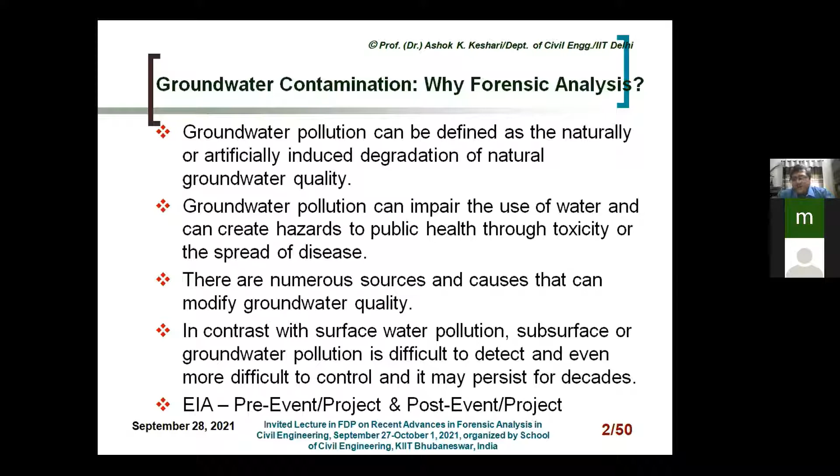And in the forensic analysis, we try to investigate or to find out that really this is the industry, or this is the event, or this is the reason why the contamination has taken place, by ruling out all other possible sources of the contamination, which can happen theoretically, but practically in the prevailing situation they may not be responsible. That means you are singling out one or two activities or one or two industries which are responsible for the contamination. So that is what we mean here. You have to do the forensic analysis for groundwater contamination. Okay, let's go to the next.

If we go for this, the points come which basically make this problem a big challenge, and that is the wastewater generation is increasing many-fold, and managing wastewater is becoming a major challenge, as waste disposal is no longer an easy task for industry. If you think of any industry, whether it is an automobile industry or a steel industry or a metallic industry or any kind of manufacturing industry, you will find that most industries are going to generate a lot of wastewater. And certainly the amount of water which gets generated will depend from one industry to another.

So the question becomes how they are going to dispose. And that is where the problem comes, when they are not able to dispose in the right way, and that is what leads to the contamination problem, either to the river or to the groundwater. So we will confine the lecture here mostly to the groundwater, but on the periphery, for basic understanding, you can see here that it can also contaminate the rivers or the lakes.

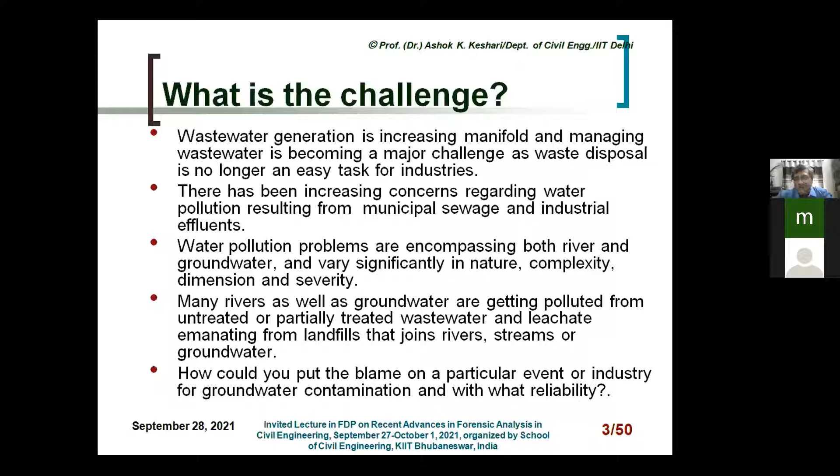So that is where, in the last bullet, if you see, the question comes: how could you put the blame on a particular event or industry for groundwater contamination? And if you are putting that blame, then what is the reliability associated with your statement that this is the source, or this has really caused the pollution problem? So that is why the last bullet becomes important in that sense.

In industry, you'll observe the effluent treatment plants are not up to the mark, or the way they dispose wastewater through the conveyance system - if that uses unlined drains or a natural drain, during the course of travel it will go on contaminating the groundwater resources.

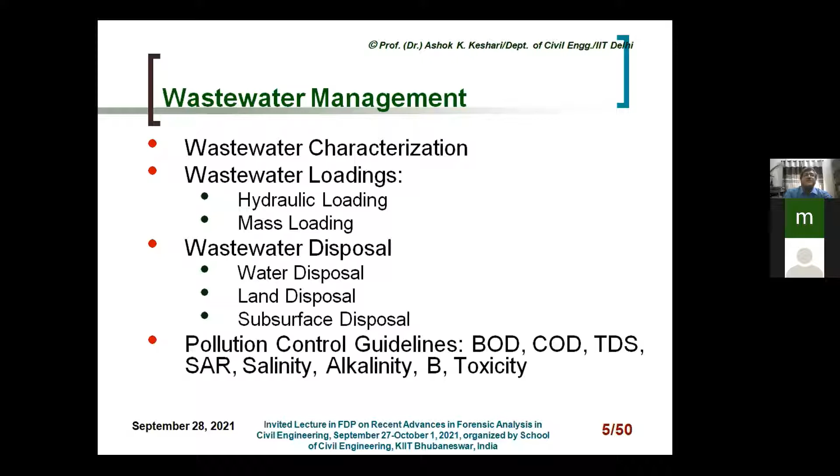See here the scenario we have in the Indian setup for the wastewater that leads to pollution. In general, if you see the wastewater generation, depending upon the city, the generation is going to be different.

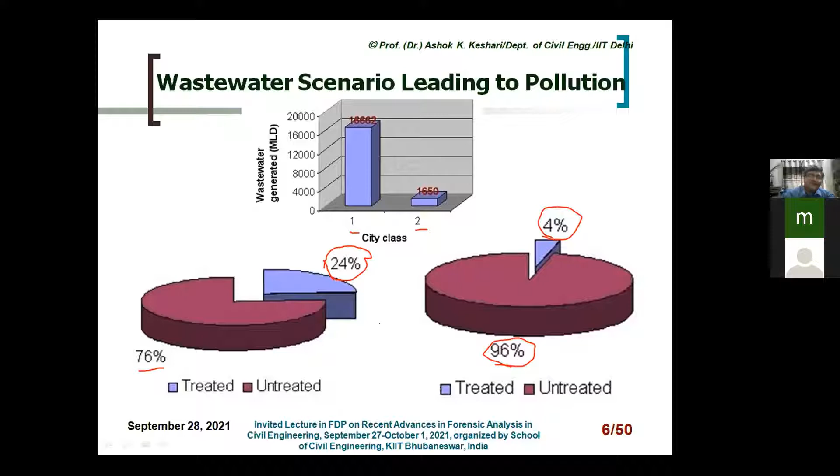And that is why it becomes a problem, and certainly some of the partially treated or untreated wastewater joins rivers also. There's just one slide I'm showing you about the Yamuna river water.

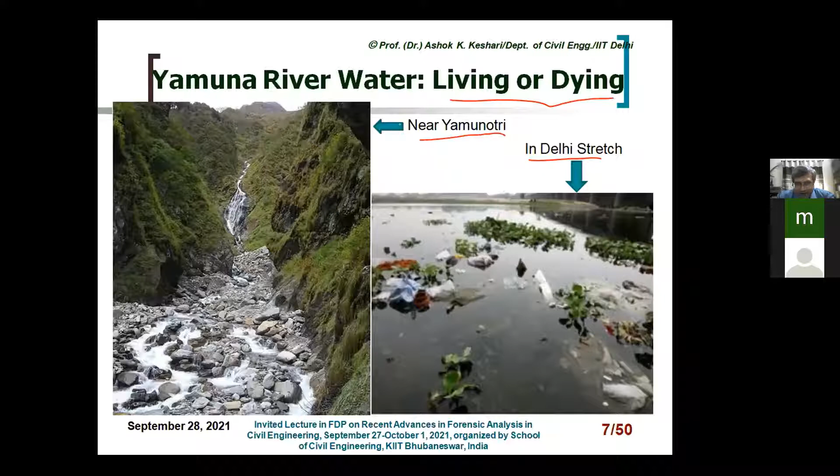Now, if the quality has already degraded so much, even if you add a small amount of water with a BOD of say 10 or 5 milligrams per liter, it is going to create further negative problems. That means it will further degrade because it is already in a bad state, so it doesn't have its own capacity to purify. This self-purification capacity of the river has already been lost, and that's why it is something like dying.

Think of the Yamuna floodplain all along the river course, which during the monsoon gets recharged, and that water goes to the groundwater, replenishing the groundwater system. So when it gets replenished during the monsoon, it not only raises the water level but also gives you the fluxes of contaminants coming from the surface water or river, meaning an exchange of contaminants from the surface water body to the groundwater body is taking place.

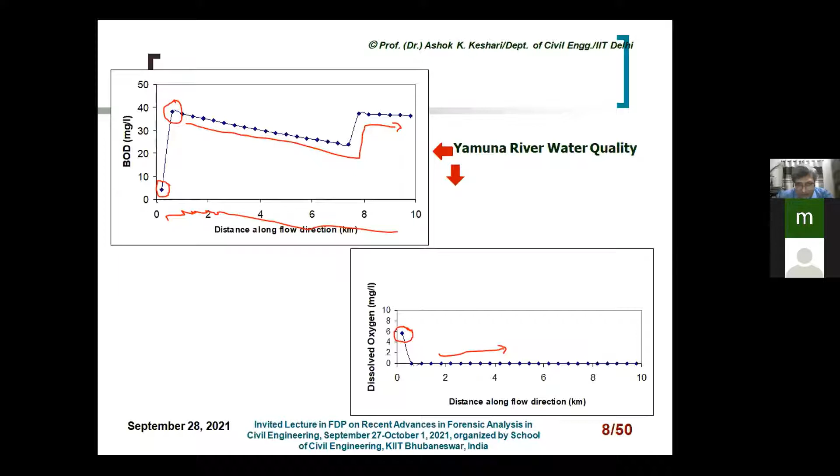So on the surface, you are getting pollutants from industry, and that pollutant gets transferred to the groundwater through the connectivity of the river and the aquifer. This could happen in some situations, but not necessarily everywhere. Somewhere you will find groundwater contamination standalone, due to industry rather than any connectivity with the river. So most of the pollutants nowadays can be found in the groundwater, all types of contaminants.

There was a time when there was a myth that whatever you take from a hand pump or tube well would be clean, but that myth is not true today, because you can find all sorts of substances there. You may have physical substances, inorganic chemicals, organic matter, and certainly metals, which you can find at many places. You may even have biological contaminants, but certainly in the upper layer, not at 100 or 150 meters depth, but in the upper layer of the aquifer, maybe around 30 or 40 meters.

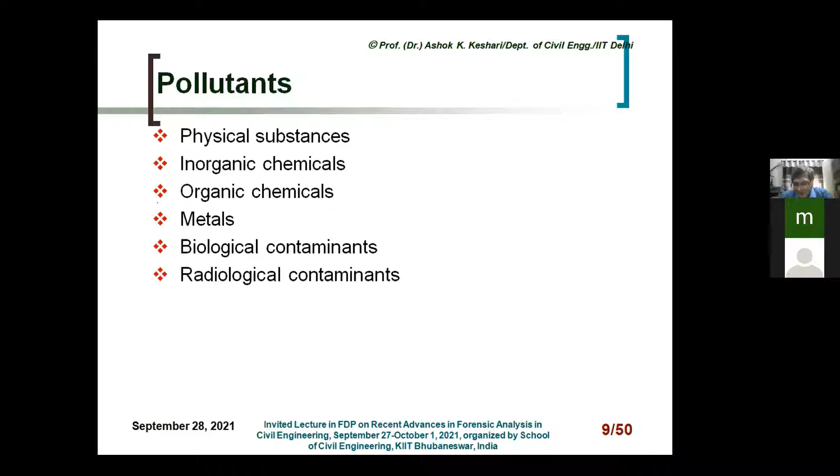And of course, radiological contaminants you can find because of some industry or some nuclear power plant. You can find at some places some radioactive contaminants also. So if you think of the groundwater in general, if you talk about the dissolved constituents, because most of the time when we analyze groundwater, you will find that the contaminants are dissolved. So you will be taking the sample, and you can analyze what kind of chemical species are there.

But there could be some situations where the contaminants are not dissolved in water; they may be in aqueous phase, but they are not dissolvable in water. So they will be in a different phase, and that is something we call a non-aqueous phase liquid, NAPL, and then we have to deal with those kinds of substances separately.

So in general, as I said, as a background in groundwater, even if there is no contamination, you will find some chemical species and concentrations of some chemical species. So in general, depending upon the concentration level, we say what are the major constituents, or secondary, minor, or trace. So this is what you see here, the ranges. These are just a typical range I have given you, just to tell you that in groundwater, you may get a situation like this.

Like if you find a constituent of the order of 1 to 1000 milligram per liter, or ppm, basically they are the major constituents and they are of concern. And mostly you'll find this order for this kind of chemical concentration. So you may have sodium ion, calcium, magnesium, bicarbonate, sulfate, chloride, or silica. For secondary, you see iron, fluoride, and then you may have here around 0.01 to 10 ppm. The nitrate also, the boron also.

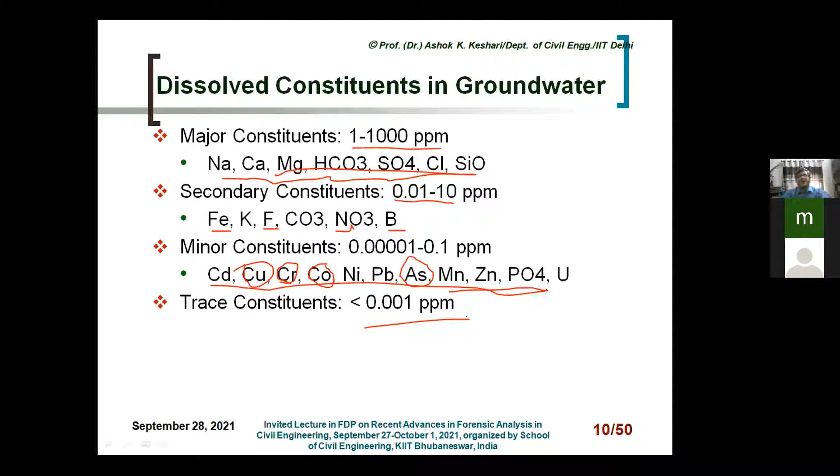But in general, clubbing all the anions or cations, many times we express it in terms of TDS. And in terms of TDS, we can call it fresh water if you have less than 1000 ppm. We call it brackish groundwater if you have in the range of 1000 to 10,000 ppm. You can call it saline if you have around 10,000 to 100,000, and certainly more than 100,000 ppm is going to be the brine solution.

And as you know, there are many pockets in India which have brackish water, especially in western UP, Haryana and Rajasthan, and there are many areas which are saline; as I said, you can find saline water in Haryana and western UP, but all coastal areas are going to have saline water. So these are the constituents which are important for

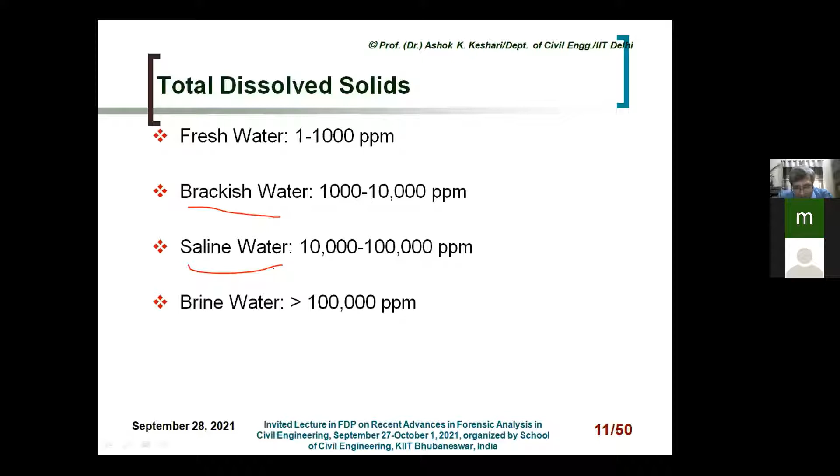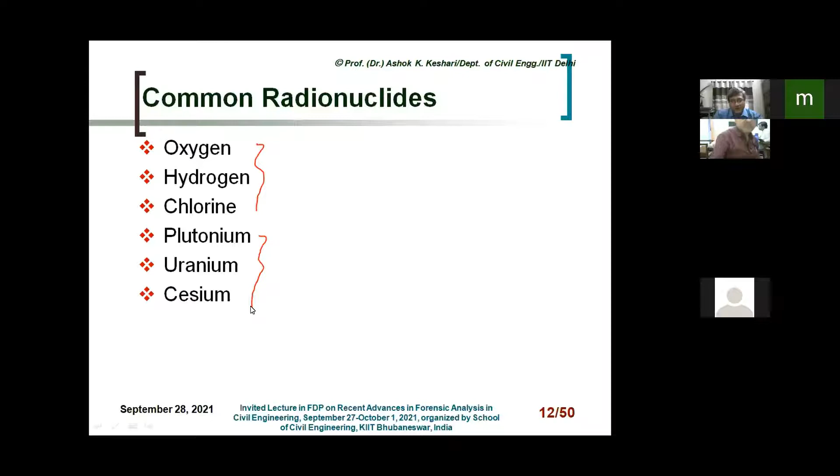under the chain reactions, breaking from one element to the other. So those are the processes one has to consider when you talk about a power plant or some other sources.

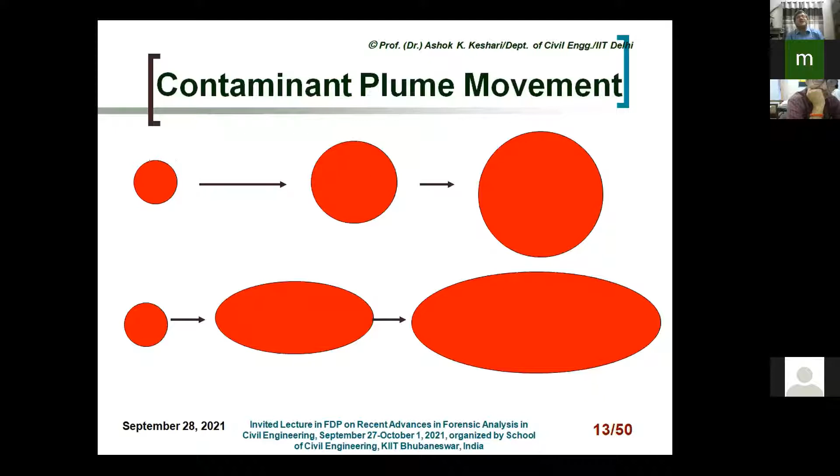Now, coming to how you study how contamination takes place in groundwater because of some industry or some processes or some event, you can see it here for your understanding. Let us say I put a drop of contaminant in a river or a water body which is moving. So think of a water body just like a river, or in a laboratory, suppose you have a flume. So in the flume, if you drop one drop of the contaminant here, what you will find because of the fluid motion, and let us say there is a uniform flow and the velocity is u here, here is also u.

So there is a uniform flow and that velocity is u. So because of this velocity, this contaminant will travel from here to here, as you see it here. But with the time, as you see, this has become larger in size. Again, it has traveled because of the motion from here to here, but it has become further larger.

So what happens with the time, a small drop of the contaminant will go on spreading in a larger area, and it is going to contaminate a larger area. And that is why you see with the time the whole area or the whole thing becomes contaminated. But if you compare with the groundwater contamination, you'll find a difference here.

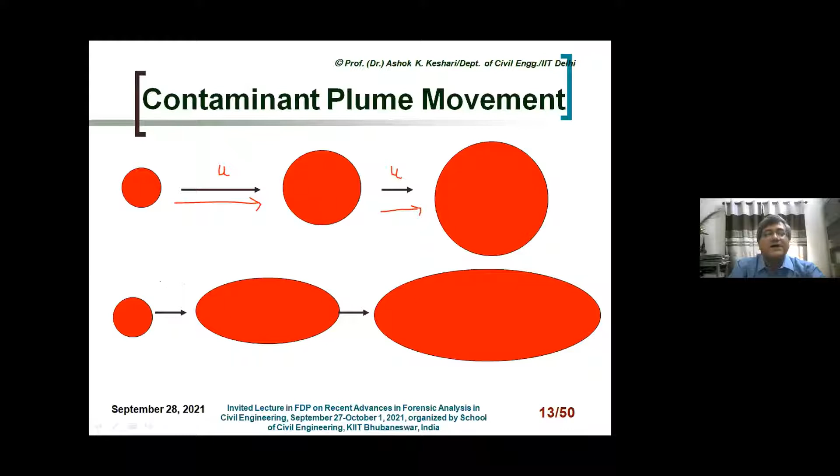So if you have a groundwater and if you maintain the same velocity u as a uniform velocity, you'll observe a distinction here. The distinction, what you'll observe, that here also the contaminant drop which you have seen, that gets enlarged. But enlarged here is more in the longitudinal direction, and you have less in the transverse direction.

So there is a difference here in comparison to what you see in a channel or in a river or in a flow. So in groundwater, the spreading of the contaminant is going to be more along the flow and less along the transverse. Similarly, with the time when it gets advanced, you have further enlargement and more in the longitudinal direction here and the less in the transverse direction.

So this kind of the characteristics you'll observe, and that has to be conceptualized when you try to make a mathematical model for understanding or investigating the movement of the contaminant. And that is how we say that you have to track down the plume and how that plume is moving with the time. Sometimes this plume, let us say this plume is here, it gets translated, but sometimes it may not get translated in this fashion. Maybe you have contours like this, or you may have enlargement like this.

So that means at the beginning, you remain with the same concentration. So that means in the beginning, you remain a point here, and from here, you get a spreading like this with the time. So you see how the plumes are moving. So this may be at, let us say, at T1. This may be at T2. This may be situation at T3. And let us say this situation is at T4 here.

So certainly this is a transient phenomena, and you can observe that the plumes are having this shape, they are enlarging with the time. So that is how you have to see which kind of the source might have resulted this kind of the contamination. And there you have to link up this plume movement with the waste, the loadings of the pollutant. You remember I was talking about the wastewater characterization and the wastewater loading.

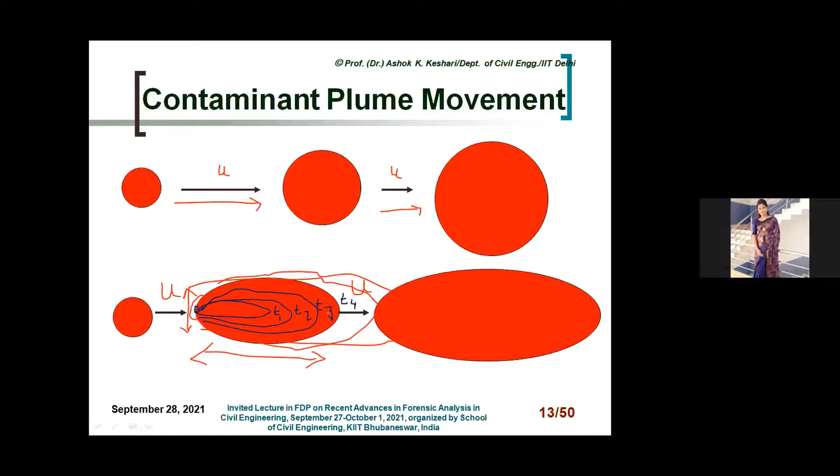So here, what could be the pollutant loading, and because of that pollutant loading, how the plumes are behaving with the time. That can give you a kind of the cause and effect relationship, and it can help you that really this kind of the response may result if you have a pollutant loading of this particular industry and of this kind. So that is how we go on analyzing in the inverse way by linking the plume behavior or the plume movement with the type of the pollutant loading which can result from a particular industry.

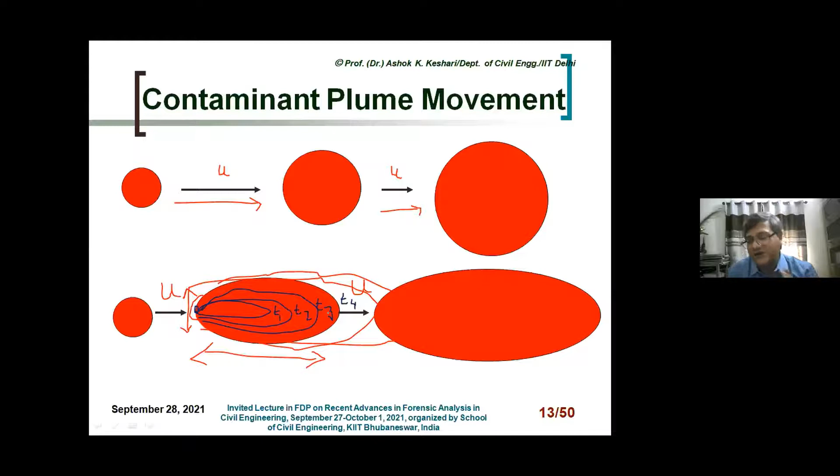Okay, so when you do the analysis mathematically, certainly the different processes we take, the transport mechanisms, and that we call advection, dispersion, diffusion. These three processes are going to be there for any type of the contaminant you talk about, resulting from any industry, and they'll be mostly guided by water velocity and what kind of the porous configuration you have.

So that's why the advection is primarily because of the bulk motion of the groundwater. The diffusion is primarily because of the concentration gradient. So that means at the point where the waste or the pollutant is being disposed, or there is a polluting source, and then the place where it is fresh, you have a high concentration gradient. Because of this concentration gradient, the contaminant will move, and that is what we call diffusion. Dispersion comes primarily because of the velocity variation.

So you have the pores, and the pores are going to have different diameters or different sizes at different places. So the flow through the pores is going to be different at different points, and that variation results in dispersion of some of the contaminant, and that is what we call mechanical dispersion or simple dispersion.

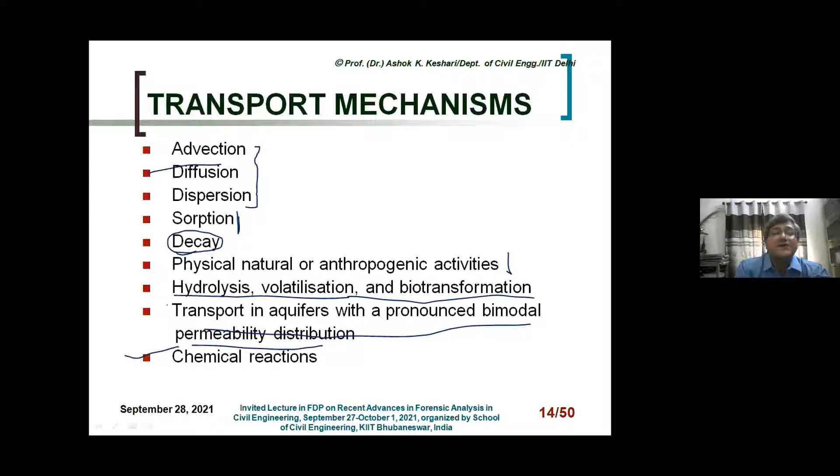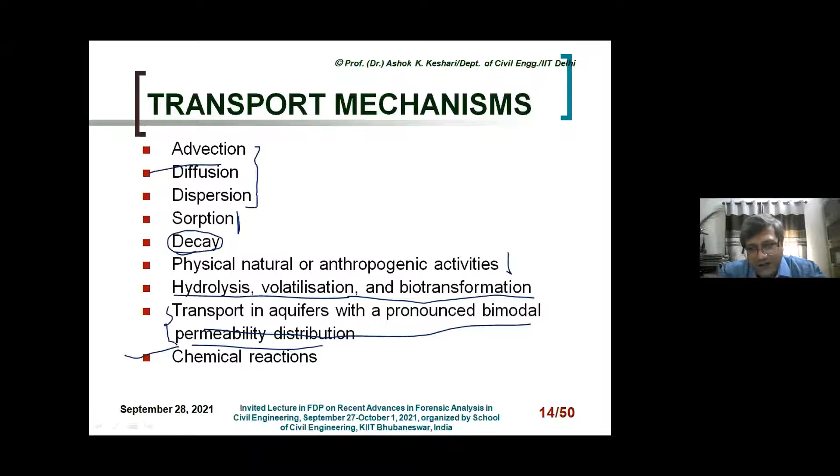Then we have the transport in aquifers with a pronounced bimodal permeability distribution. This is especially true when we talk about pollution problems in the hard rock area. So if there is an industry or anything located in the hard rock area, then there the porosity is not of one kind. That is what we call a dual porosity model, where we have to define primary and secondary porosity, and then we have to think how the contaminant will migrate through these pores. So the model description becomes different here.

The other geochemical processes which may be relevant here, as I said, could be decay. The adsorption and desorption is primarily, as I said, because of the interaction between the ions present in water and present in the media. The reactions could involve dissolution and precipitation of some of the substances. There could be acidification, mineralization, natural weathering or leaching, or any kind of complex reaction. That is what we call a complexation procedure.

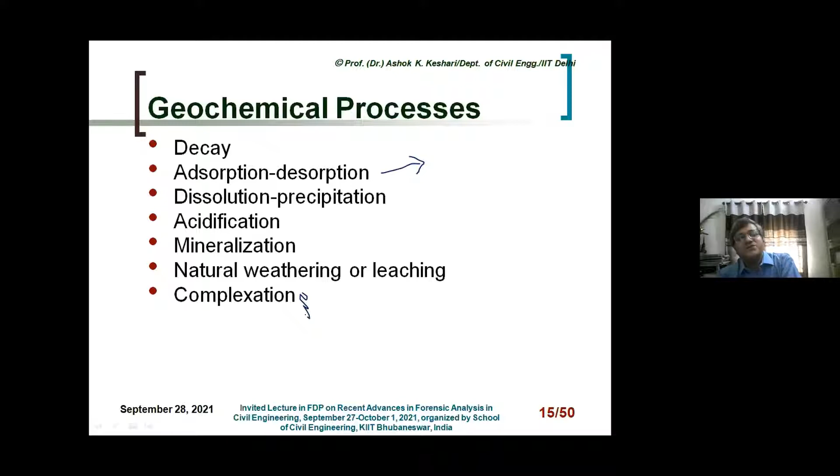So one has to see, first of all, what are the sources which can result because of some industry or some process or some event, and really what are the processes which can happen, and then you have to make an analysis for that, or make a mathematical model to simulate that kind of process to know the effect or distribution.

So when we go for developing a mathematical model to understand this kind of phenomena or to analyze scientifically, we primarily define the contaminant fluxes. The contaminant fluxes, as you see here, could be the advective flux, which is primarily because of the bulk motion of groundwater. Then there could be a diffusive flux, which is the spreading of the contaminant because of the concentration gradient. That tells you the random movement of the contaminant molecules in a fluid. And then there is a dispersive flux, happening because of the variation in the velocity or variation in the pores at the microscopic level.

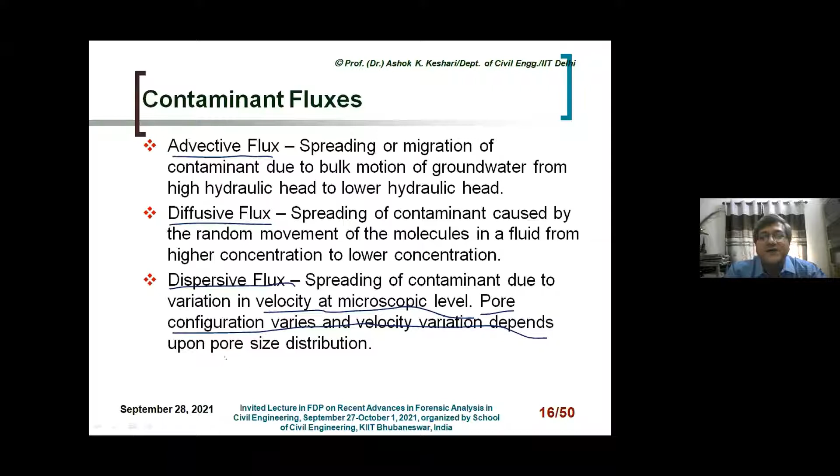And that is where, as I said, the pore configuration varies, so velocity also varies, and that is going to depend upon the pore size distribution. So with this basic understanding, we define the fluxes in a mathematical form like this. You see here the advective flux, the first one. This is the product of the velocity and the concentration.

The diffusive flux we define like this. So you have a change in concentration gradient here, and this is the molecular diffusion. So that Dd is the molecular diffusion. I have put it here as Dd star, which indicates the molecular diffusion in the porous media. The ij is in tensor notation to tell you that in the case of 2 or 3 dimensions, this is going to behave like a matrix. So you will be having all components, something like this.

Let us say here Dd. So ij means, if it is 3-dimensional, there will be here Dd xx, then Dd xy, just like a tensor, and this is Dd xz. So all 3 dimensions will come here. So you will be having 9 components here.

Similarly, on this side, you are going to have Dd yx, Dd yy, Dd yz, and then the third row is going to be your Dd zx, then Dd zy, and then Dd zz. Sorry. So like that, you will be having the 9 components here. So this is what it tells you.

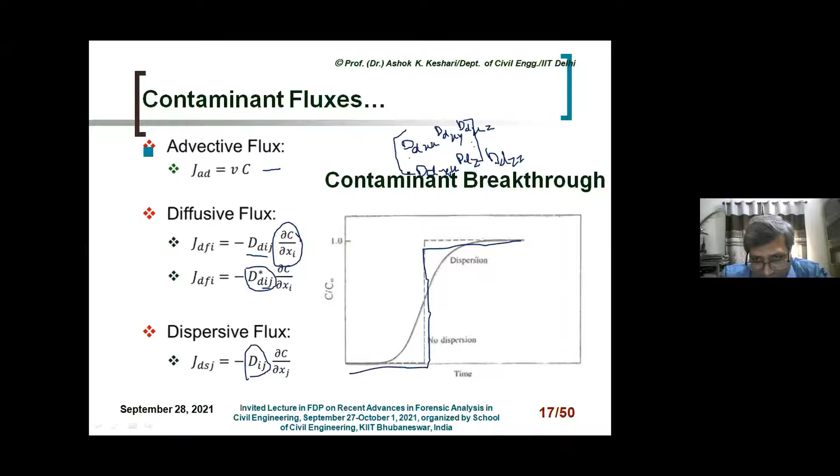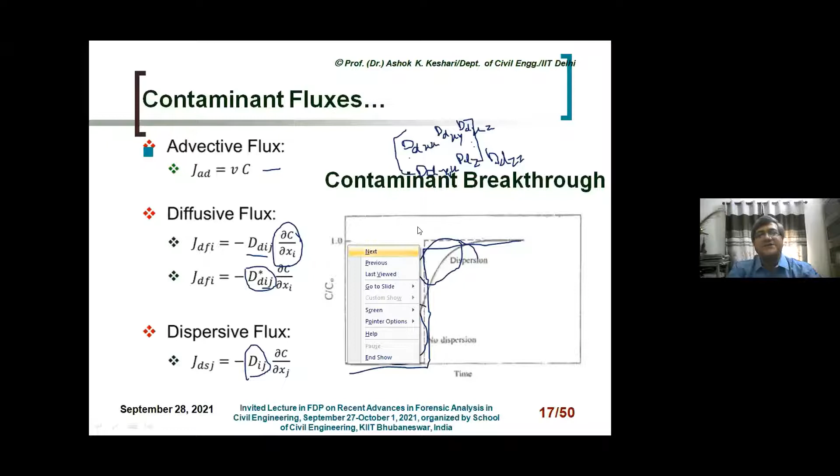But because of dispersion or diffusion, some of the contaminant particles are moving faster and some are moving slower, and that's why you have a smeared type of curve here. So because of this dispersion and diffusion, the concentration breakthrough is going to be of this kind rather than a sharp interface. So these are the basics I have just illustrated for such kind of analysis.

I'll talk about some mathematical models in 1 dimension, then we'll go to 2 dimensions and 3 dimensions. After 1 dimension, I will have a pause, and then I will have some discussion with you. Then I'll give you some case studies so that you can have a better picture of how it looks after the analysis. So I'll give you some case studies after a few slides.

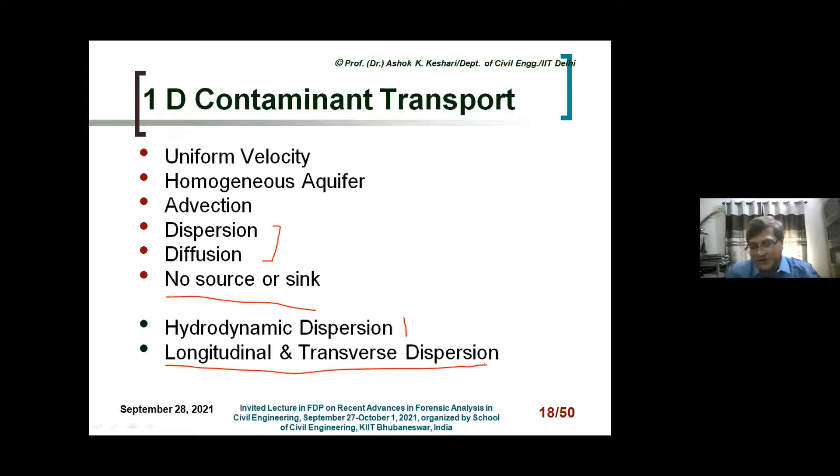So when you talk about the 1D contaminant transport model, let us think we have uniform velocity, a homogeneous aquifer, and advection, dispersion, and diffusion. This is the basic assumption we are making for a 1-dimensional model, and there is no source or sink term. And of course we consider hydrodynamic dispersion, which is the sum of both dispersion and diffusion. And as I said, longitudinal and transverse dispersion will be there, because in groundwater longitudinal dispersion is more and transverse is less.

So the one-dimensional contaminant transport model will look like this. The governing equation has the change in concentration, del C upon del t. This is the concentration change of any chemical species, so C could be nitrate, sulfate, chloride, any chemical species. This is the velocity of groundwater. This is the change in the concentration gradient along x. This is the hydrodynamic dispersion, DH, which is the sum of mechanical dispersion, D, plus molecular diffusion, Dd star. And then your second order derivative, del 2C upon del x square.

And as I said, the longitudinal dispersion is the product of alpha L, the dispersivity, multiplied by the groundwater velocity. Similarly, for transverse dispersion, we take the transverse dispersivity multiplied by the velocity V. So you can approximate like this. As you see, when the velocity changes, your longitudinal and transverse dispersion is going to be different. When dispersion changes, certainly the concentration changes, and C is a function of x and t in one dimension.

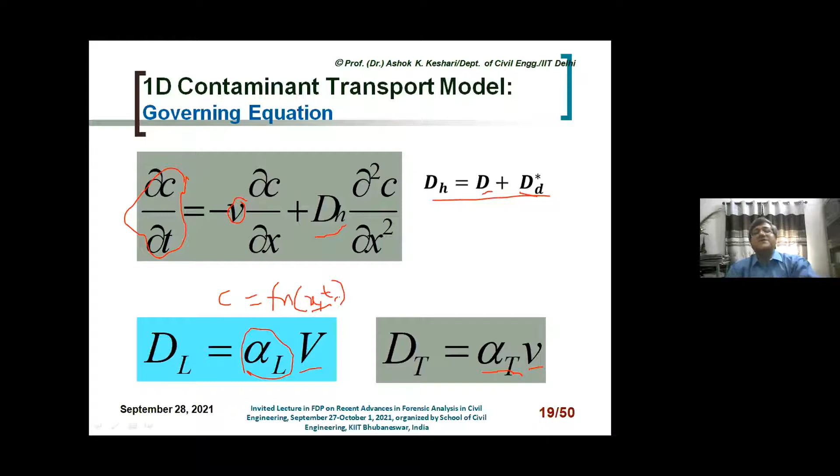Similarly, you can have in real life two-dimensional, three-dimensional problems here. And then you can know what is going to be the concentration. And then you can see whether this is really polluting or not polluting, depending upon what is the limitation for drinking water or for irrigation purpose or for industrial use. Or whether this industry has caused any contamination or not, whether this is giving you toxicity level or not. Those kind of scenarios you can see once you know what is going to be the concentration at a particular point and at a particular time.

So I'm just talking about a one-dimensional problem. Think of that you have a contaminant which is moving in one dimension in the groundwater. So just like a sand column, think of that you have a sand column which is one dimensional, and then you have injected some contaminant. So how is that going to spread? That is what it says here. Initially, you don't have any contamination, but you have injected some contaminant, and that is going to move from the point where you have injected to the downstream wherever it can propagate.

So let us consider transport of a dissolved contaminant in a porous column of sand or soil, which is initially free from any contaminant. So initially there is no contamination, so there is no chemical species present here. If contaminated water, let us say, enters this porous column or porous medium at a particular point, we are interested to know how this concentration of the contaminant changes within the column at various time and space. What is going to be the value at a different point and at different time?

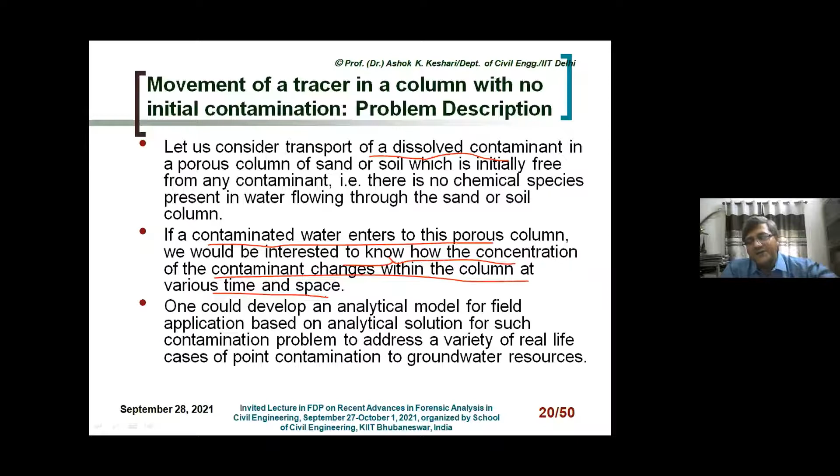And that is how you can make an analytical model, and then you can solve and you can know that if a contaminant is coming because of any industry or because of any other process at a particular point, how that is going to migrate. If you invert, that can give you the tracking of the place from where the contaminant has come. So this is based on the analytical solution given by Ogata and Banks.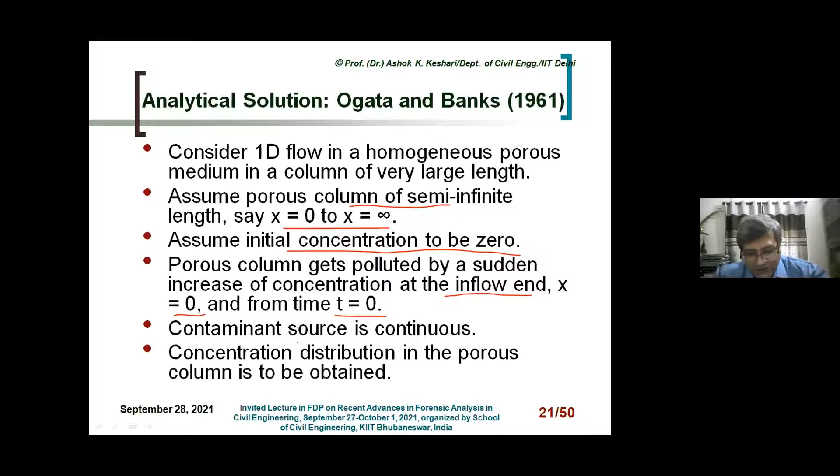And think of this as a continuous contaminant. So that means there may be some industry which is continuously releasing some of the contaminant at a particular point, and that is why it is a continuous source. Because of this continuous source, we get the analytical solution from here. So again, the same equation will hold true. We call this the advection dispersion equation, in one dimension. So we put the initial condition and boundary condition.

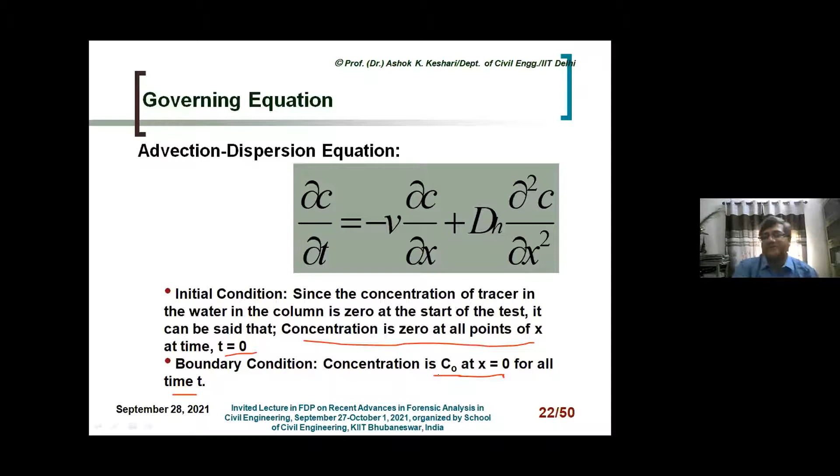And as you know, the initial condition was C equal to 0 at t equal to 0. That was your initial condition. And the boundary condition was that you have a C naught, let us say, at x equal to 0 for all time t. Now you're interested to know what is going to be the value of C because of this contaminant at different x and time. So a solution can be given for this as an analytical model.

This is the solution here. One can estimate. So this is the concentration of the contaminant which has been injected. So you can know from here the concentration at any x at any time t. You can see here this is a complementary function. This is known as the complementary error function, ERFC. X is your distance where you want to determine.

V is velocity, T is time, DHL is your hydrodynamic dispersion longitudinal. This is the exponential function, xv/DhL I have explained you, and this is also a complementary error function. This hydrodynamic dispersion you can estimate from this expression, DHL equals alpha L into V, which is your longitudinal dispersivity into velocity plus your molecular diffusion.

If a pollutant has been injected with concentration C0, let's say 2000 milligram per liter, at this point, you can know the distance X and time T after 1 year, 2 year, 5 year. You put the value of X and T here, determine the groundwater velocity, and based on that the hydrodynamic dispersion. Then you plug in, get the value of the complementary error function and exponential function, and get the value of C here.

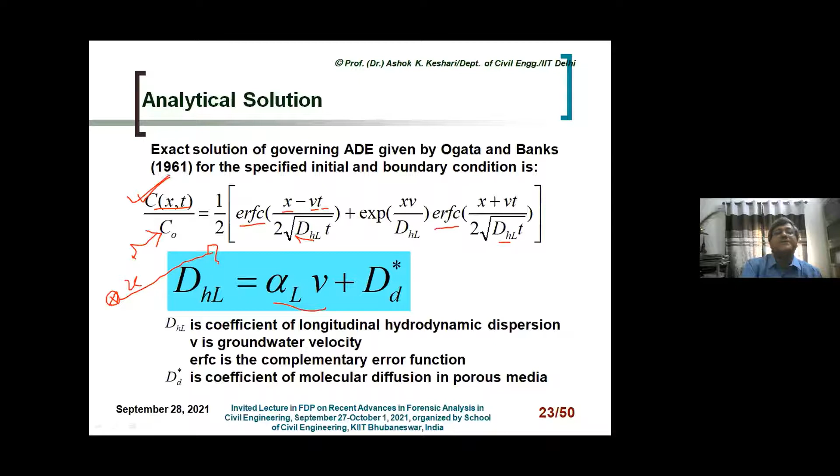Similarly, the complementary error function is defined in a similar way, but the limit is from x to infinity. The property is that if you add the complementary error function and error function, it equals 1. So to get the complementary error function, you simply subtract the error function value from 1. Any standard engineering mathematics book, or most computer programs, can give you values for the error function. Once you know the error function, you get the complementary error function by this expression, then go back and calculate the first term and second term, plug this in, and you get the value of C, the concentration. This is how the analytical model is used.

But in real life, you will be involving complex problems, so you'll be having 2-dimensional and 3-dimensional problems. I will discuss now some case studies where you will have 2 and 3-dimensional problems.

So with this basic background or foundation on this groundwater contamination topic for the analysis, I will just keep a pause for a few minutes to have some interaction with you.

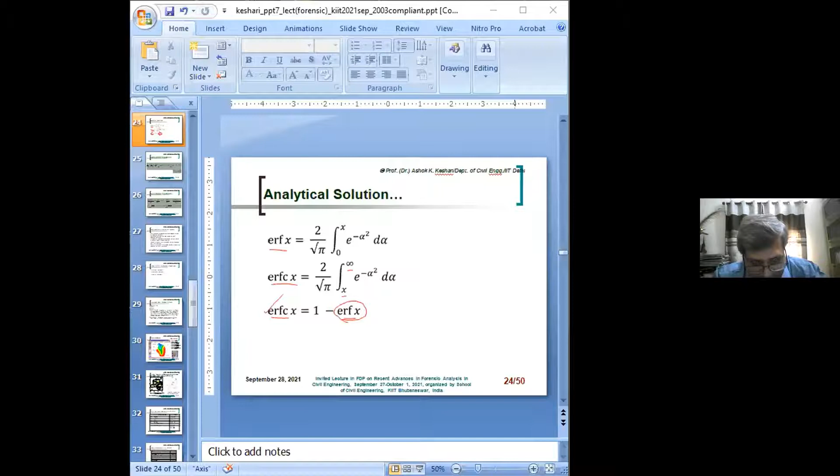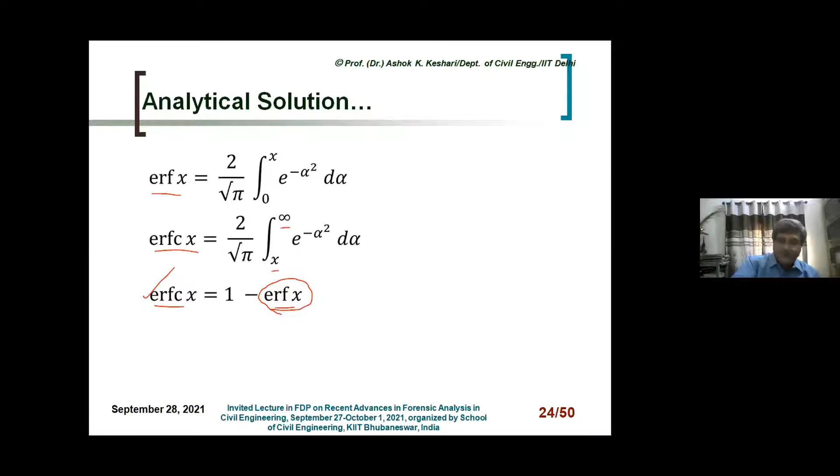In real life, when you have 2-dimensional, 3-dimensional problems, you primarily involve an equation of this kind, written in tensor notation. Here K is hydraulic conductivity, H is the hydraulic head, SS is your storage coefficient, and small q indicates the pumping per unit area from a particular grid or location. This delta is a Dirac delta function, so when x becomes xw and y becomes yw, this becomes one. Otherwise, the value of this Dirac delta function is 0.

Otherwise, it becomes 0. It helps you simulate whether a particular area has a tube well or not. If there is groundwater pumping from a particular area, the Dirac delta function for that grid takes the value of 1; otherwise it takes the value of 0. That is how we incorporate the source and sink term. So there is a sink term here for the contamination, and another source or sink term—for example, if there is a recharge.

So this is pumping, P for pumping. Subscript R here is for recharging. So here also you have a Dirac delta function. So these two together help you to simulate source and sink terms in the groundwater. So this is for the flow.

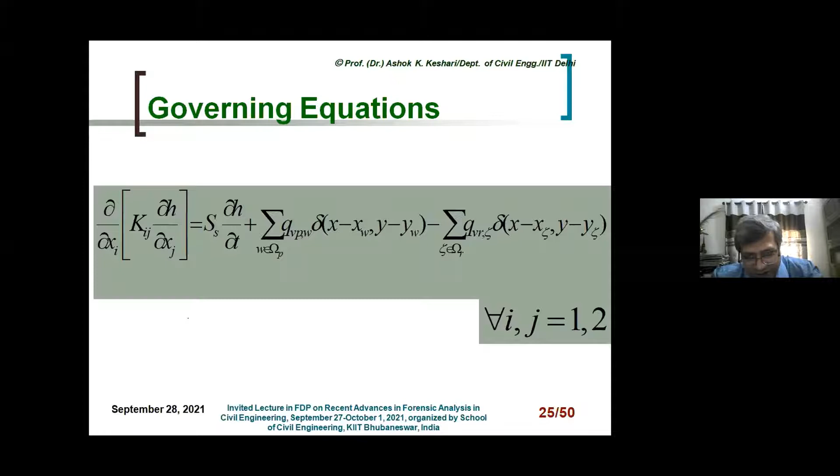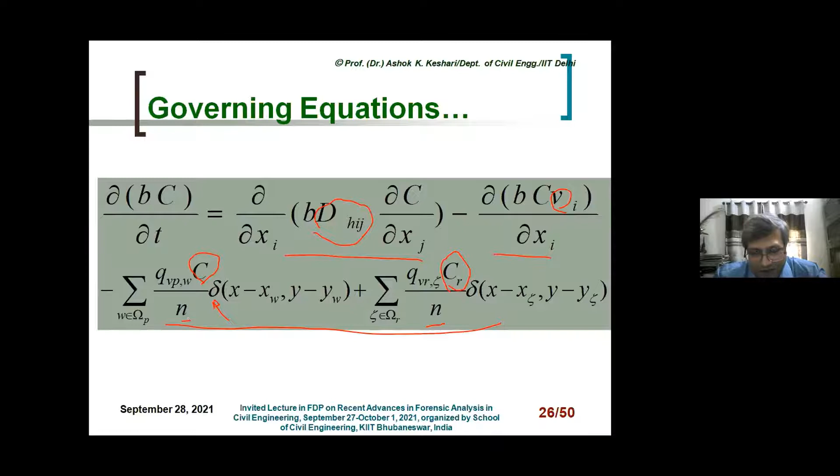So primarily, you are going to involve these two sets of equations, one for flow and one for the contaminant spreading. These two sets of equations you are going to involve in case of 2 and 3 dimensions. Either you can develop your own program to solve numerically, because you cannot solve analytically here. So generally we go for a numerical model, and in the numerical model, these partial differential equations are solved by algebraic equations. So we solve here for a set of inputs, and then you need to have a computer code or a computer program, either you develop your own or you make use of commercially available software.

I'll just give you some of the names also of the commercial software. So this is going to solve for a specified set of points. You'll be getting the solution, and then you'll be generalizing or trying to get the contour from these specific point results.

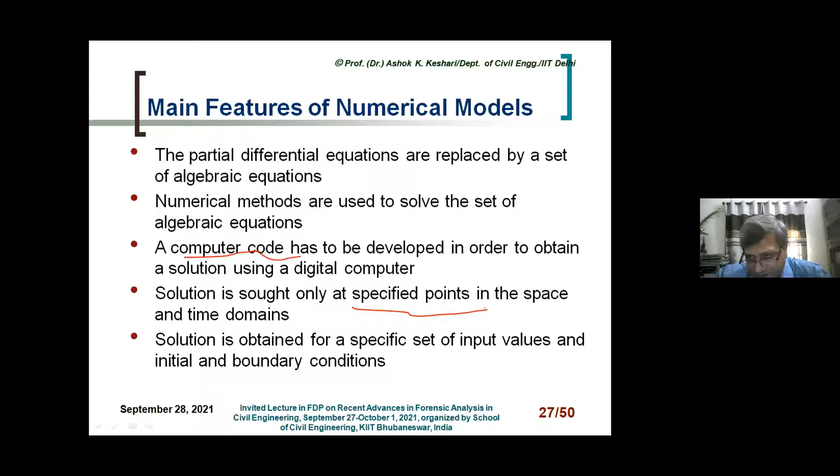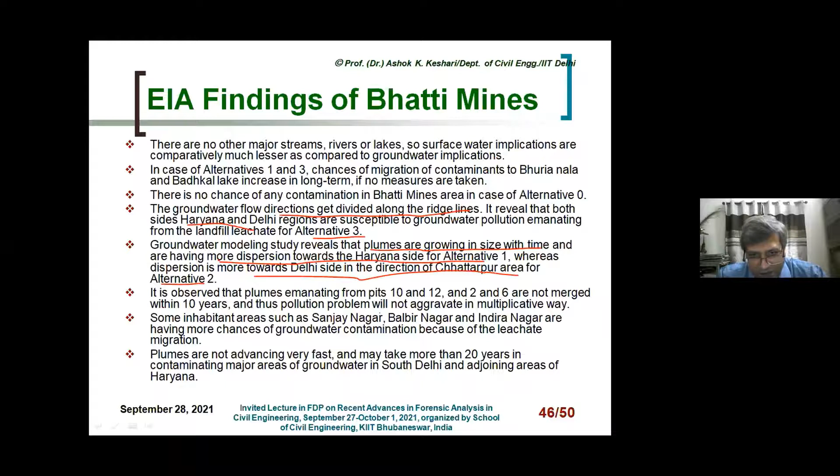And the inhabitant areas, as identified, like Sanjay Nagar, Balbir Nagar, Indira Nagar, are the more vulnerable areas, having more chances of getting their groundwater contaminated here. More or less, it is not so fast, and it is going to take around 20 years for contaminating the major areas of groundwater in South Delhi or adjoining areas of Haryana. So the time span we get tells us up to what time it is going to be more vulnerable.

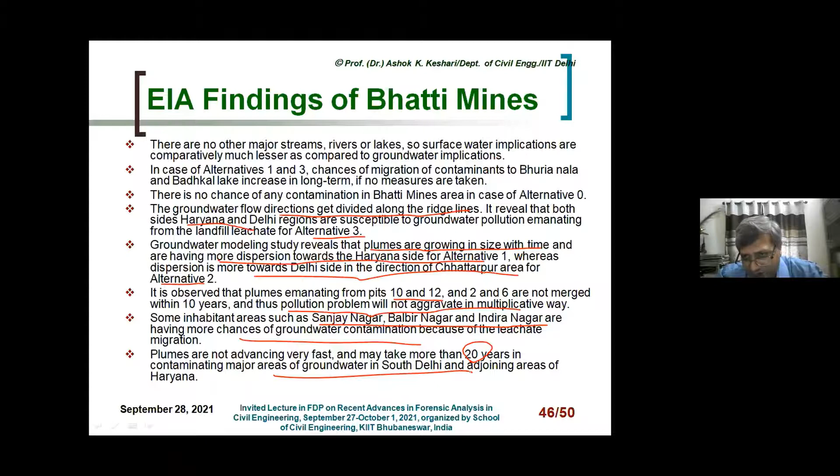So this was on that. Now I'm giving you another couple of slides for an industrial unit where we looked at whether it has resulted in any groundwater contamination or not because of this plant.

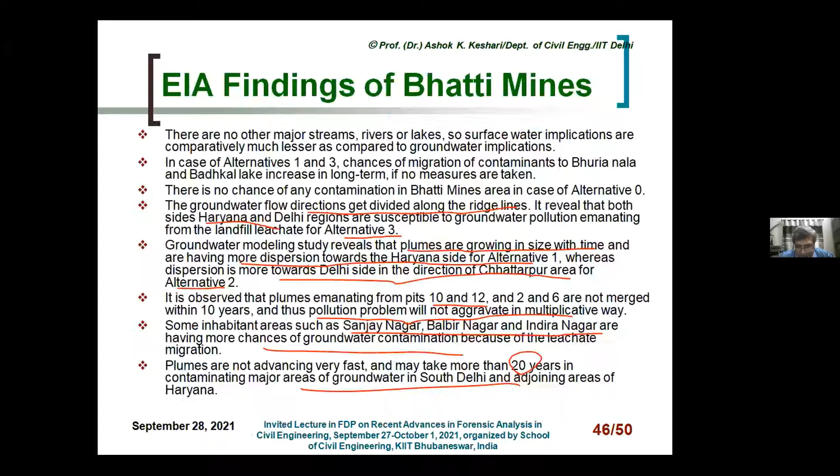So this plant is located in Ghaziabad, and you can see here this industrial area has two kinds of industry. One is the distillery unit, and there is another, the sugar unit. So it has the distillery unit and the sugar unit.

So what we do here to have compliance with zero discharge, there should not be any discharge of liquid from the industrial unit to any water body. After treatment up to the third level—there is primary, secondary, and tertiary treatment—the effluent from the distillery plant is put into a lagoon constructed here.

In this lagoon there is detention of water. The partially treated effluent is detained here for some time, and then from the sugar industry, the molasses which come out are disposed here.

This is the open area below which there is a geosynthetic liner, made of synthetic material, so that there should not be any leaching from here. Molasses are spread here, and from this detention tank containing the partially treated industrial effluent, that is used with the molasses to convert it into compost, which is then sold into the market.

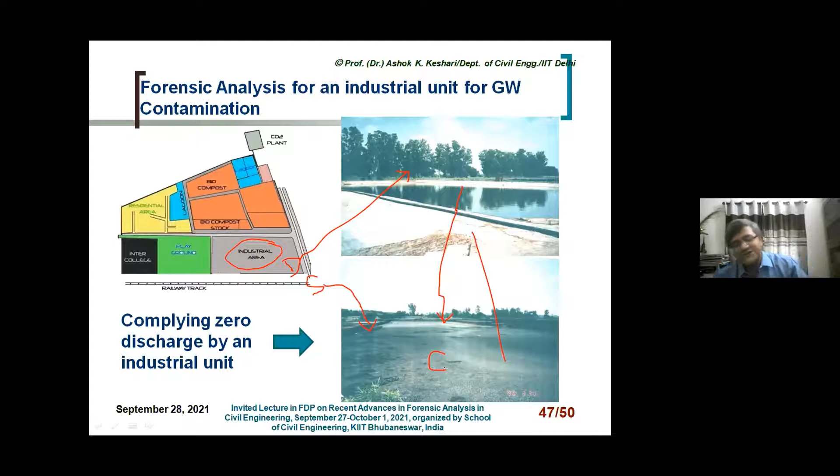So the industry doesn't allow any water to be disposed into a river or any land, meaning they comply with zero discharge. That is the ZLD plant—you can call it the ZLD plant—in compliance with pollution regulations nowadays.

But now the question remains: because of this lagoon and the compost plant, do you have any contaminant which migrates and contaminates adjoining groundwater? That is what we investigated. So we put piezometers all around this detention tank or oxidation pond, and all along the biocompost yard.

From here, at certain distances, we went in all radial directions from this source. We tried to see where the flow direction is. One can go in all directions, but primarily the flow direction is along three directions—this, this, and this. There is no movement along this other direction, I can say, so I can cross that one out.

There is no flow direction in this one. But in these three directions, you have flow, and the flow is dominant in these three directions.

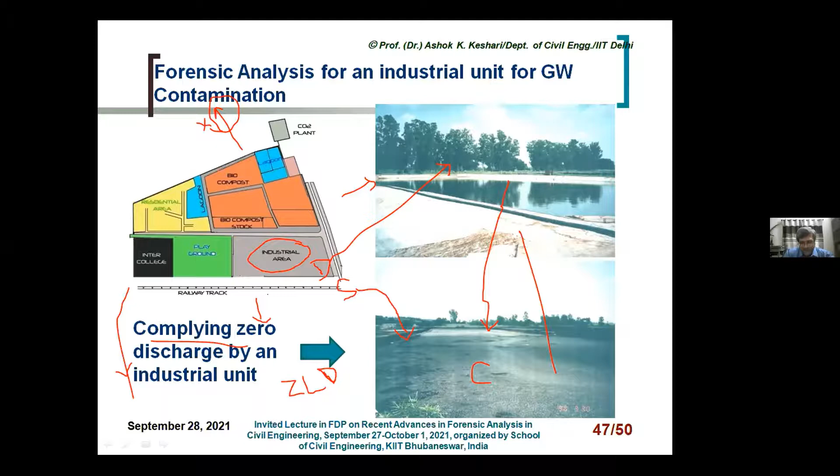So we tried to investigate the migration of contaminant, if anything happened, and took samples from there. That water, through the tubewell, is utilized for irrigation—a field channel was created, and samples were measured there for analysis. So that is putting piezometers for groundwater level monitoring, then groundwater sampling from locations around the industrial unit, and determining chemical concentration in groundwater.

Then you try to find the cause and effect analysis through a mathematical model—whether samples taken away from the industrial place really have contaminants migrated from that industry or not. You make a plausible hypothesis, do hypothesis testing, and based on that analysis from the mathematical model, you can interpret and verify whether that has really caused contamination or not.

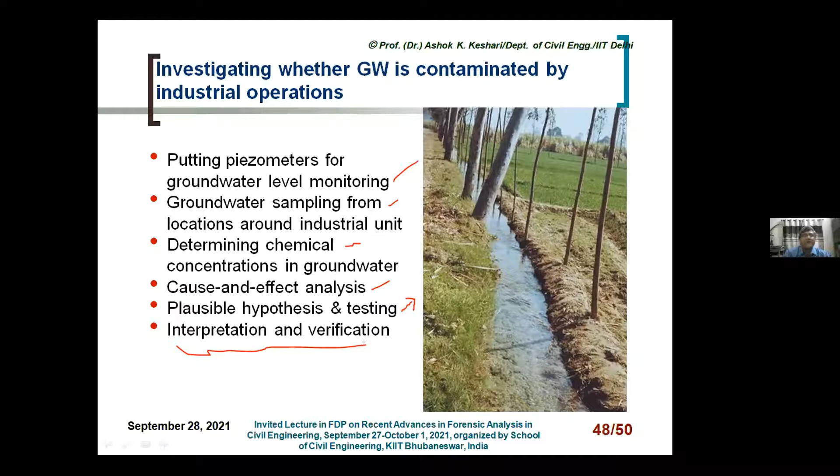In this particular case, we found that the industry was not really responsible for contaminating the groundwater in the nearby area, and there was no damage or effect on the crops because of any pollution level.

So with this, I would like to conclude today that the use of mathematical models is encouraging to address increasingly complex groundwater quality problems, and they are very helpful in the forensic analysis of groundwater contamination in real life scenarios. Mathematical models can be effectively utilized to analyze the cause and effect relationship and trace the sources or activities responsible for groundwater contamination.

One can track the evolution of plumes over time, which helps in ascertaining aggravating factors or remediation programs for groundwater contamination or restoration. Groundwater quality models can be effectively utilized for understanding groundwater contamination, evolving management strategies, or evaluating the potential impact of any engineering activity, or carrying out environmental impact assessment (EIA).

So numerical models are really useful for such analysis and help in decision making for appropriate planning, evolving mitigating measures, so that you can effectively manage your groundwater resources and take measures for protecting your groundwater from contamination resulting from industries or other sources.